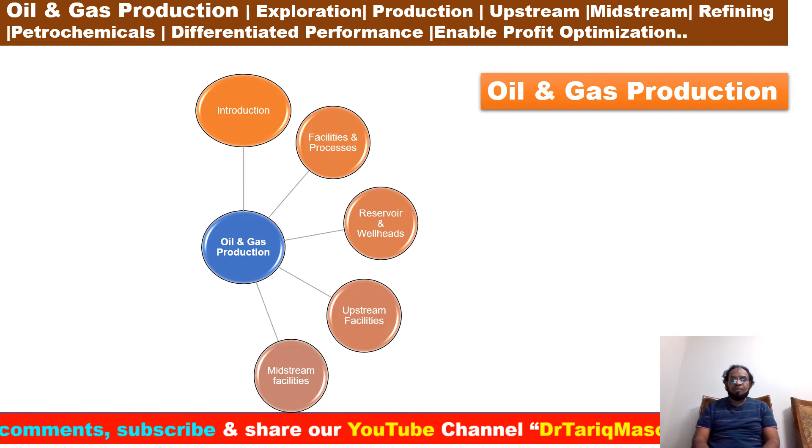Okay, this is my future plan. Oil and gas production, introductions, facilities process, reservoir and wellhead, upstream facilities, a midstream facility we have started today, refining facilities, petrochemicals, utility systems, unconventional and conventional resources and environment effects.

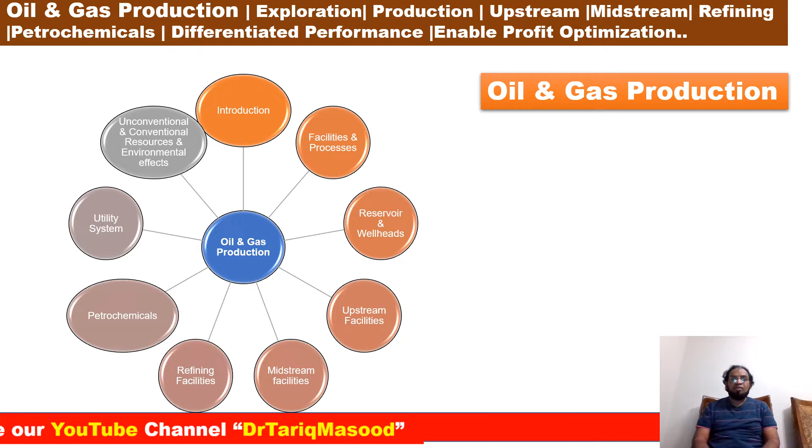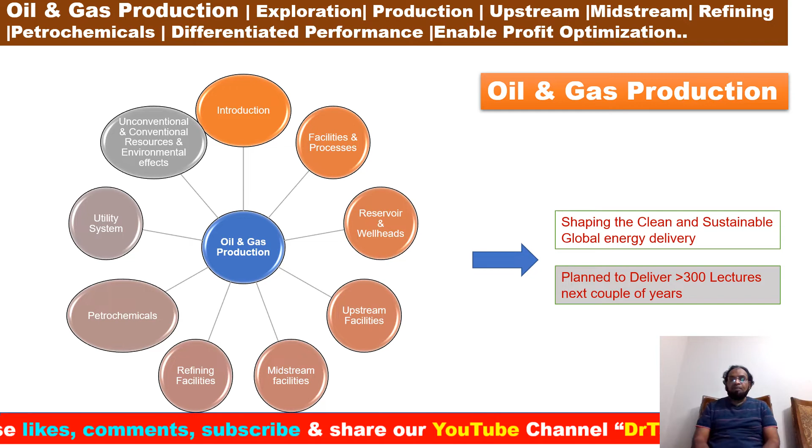Okay, what is the ultimate goal? Shaping the clean and sustainable global energy delivery. Plan to deliver more than 300 lectures in the next couple of years.

Okay, oil and gas production, midstream facilities, lecture number 17, gathering. Today we are going to discuss gathering system and gas compositions. Next, I'm going to demonstrate what are my key takeaway points. Key takeaway points from lecture number 17, facilities and process onshore and offshore. First, we'll discuss gathering system. Then we will discuss gas plant and gas composition.

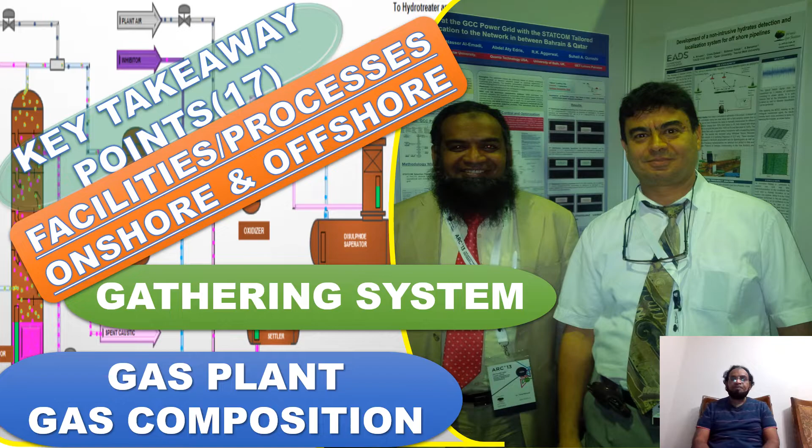Okay, midstream facilities. This is my first slide. Raw natural gas from the well consists of methane as well as many other smaller fractions of heavier hydrocarbons and various other components, including water. The gas has to be separated into marketable fractions and treated to trade specification and to protect equipment from contaminants. From the next slide, we will discuss gathering system.

Okay, gathering system. Many upstream facilities include the gathering system in the processing plants. However, for distributed gas production systems with many, often small producers, there is little processing at each location and gas production from thousands of wells over an area goes into a distributed gathering system. This system is generally composed of flow lines, FGS, and trunk lines.

What are the flow lines? A line connecting the well pad with field gathering stations, FGS, in general equipped with a fixed or mobile pig launcher.

Number two, FGS is a system allowing a gathering of several flow lines and permits transmission of the combined system to the central processing facility, also called the CPF, and measures the oil, water, gas ratio. Each FGS is composed of pig receivers, fixed or mobile.

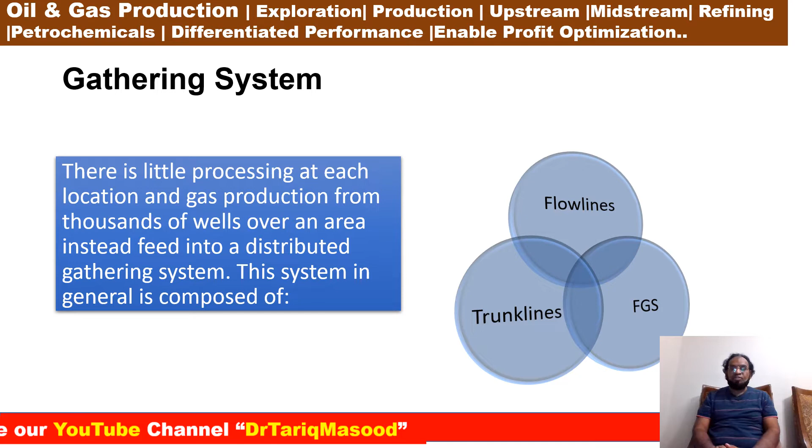Okay, gas plant, gas composition. When gas is exported, many gas trains include additional equipment for further gas processing to remove unwanted components such as hydrogen sulfide and carbon dioxide. These gases are called acids, and sweetening or acid removal is the process of removing them. Natural gas sweetening methods include absorption process, cryogenic process, adsorption process, also known as PSA, TSA, and iron sponge and membrane system.

Often hybrid combinations are used, such as cryogenic and membrane systems. Gas treatment may also include calibrations. If the delivery specification is for a specific calorific value, BTU per SCF or MJ per SCM, gas with a higher value can be adjusted by adding an inert gas, such as nitrogen. This is often done at common points such as a pipeline gathering system or pipeline onshore terminals.

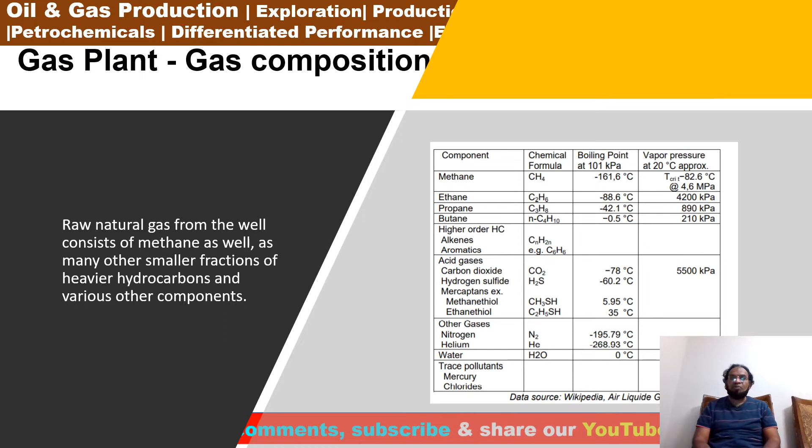Raw natural gas from the well consists of methane as well as many other smaller fractions of heavier hydrocarbons and various other components, as we have demonstrated here in the slide, with some data from Wikipedia. So you can further study the chemical formulas of methane, ethane, propane, butane, and acid gas, and the other components included in this table.

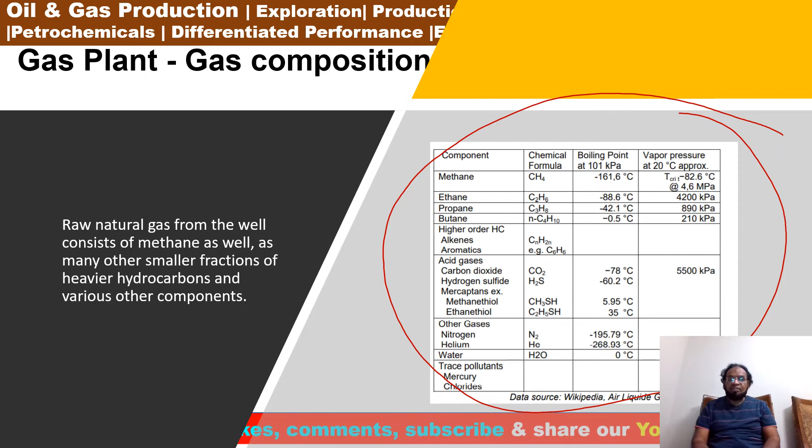Furthermore, natural gas is characterized in several ways depending on the content of these components: wet gas, dry gas, sour gas, acid gas, and condensate. First, wet gas is a raw gas with methane content of less than 85%. Number two, dry gas is a raw or treated natural gas that contains less than 15 liters of condensate per 1000 standard cubic meters. Sour gas is a raw gas with a content of more than 5.7 mg hydrogen sulfide per SCM, 0.25 grains per 100 SCF. This is about 4 ppm.

Acid gas has a high content of acidic gas such as carbon dioxide or hydrogen sulfide. Pipeline natural gas specification is typically less than 2% CO2. Acid gas fields with up to 90% CO2 exist, but the normal range for sour raw gas is 20 to 40%. Condensates are mixtures of hydrocarbons and other components, as we have discussed earlier. These are normally gases from the well, but condense out as liquid during the production process. This is a refinery and petrochemical feedstock. In my next slide, we will discuss raw gas and its product components.

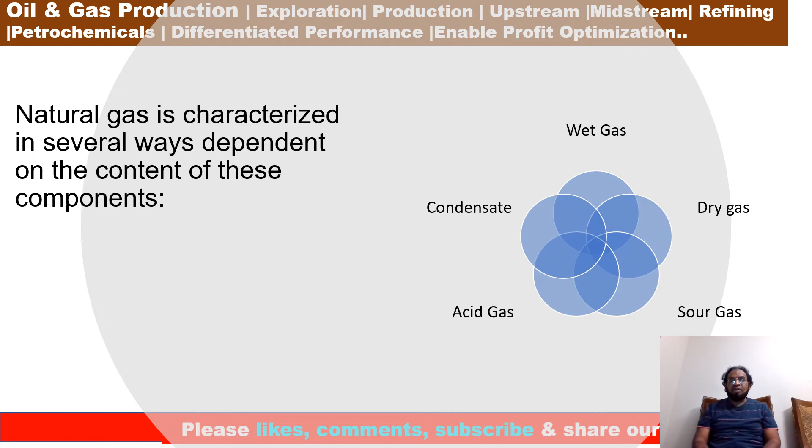Furthermore, raw gas is processed into various products or fractions: natural gas, NGL, LPG, LNG, CNG. First we'll talk about natural gas. In its marketable form it has been processed for specific compositions of hydrocarbons, sour and acid components, and energy content. The content is typically 90% methane with 10% other light alkanes. Natural gas liquid, NGL, is a processed or purified product consisting of ethane, propane, butane, or some higher alkanes, separately or in a blend. It is primarily a raw material for the petrochemical industry and it is often processed from the condensate.

Number three, liquid petroleum gas, LPG, refers to propane or butane or a mixture of these that has been compressed to liquid at room temperature, 200 to 900 kPa depending on composition. LPG is a bottled fuel for consumer domestic use and is also used as an aerosol propellant in spray cans and as a refrigerant, for example in air conditioners. Energy to volume ratio is 74% of gasoline.

Next is liquid natural gas. LNG is natural gas that is refrigerated and liquefied at below minus 162 degrees C for storage and transport. It is stored at close to atmospheric pressure, typically less than 125 kilopascal. As a liquid, LNG takes up 1/600 of the volume of the gas at room temperature. Energy to volume ratio is 66% of gasoline. After transport and storage, it is reheated, vaporized, and compressed for pipeline transport.

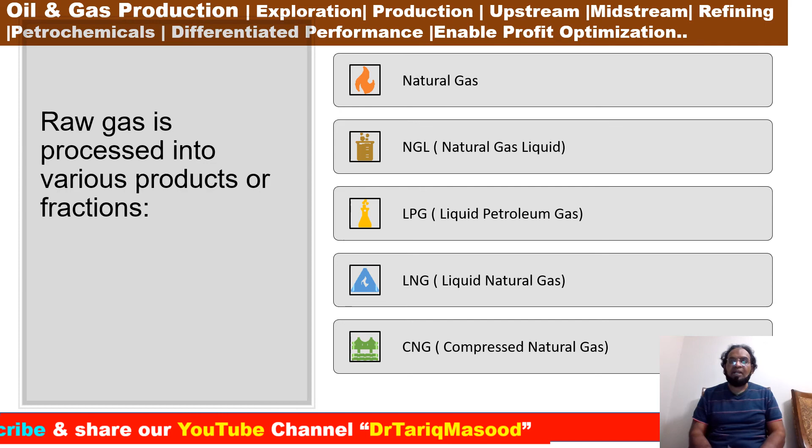Last is compressed natural gas, which is natural gas compressed at 20 to 25 MPa to less than 1% of its volume at atmospheric pressure. Unlike higher alkanes, methane cannot be kept liquid by high pressure at normal ambient temperature because of its low critical temperature. CNG is used as a less costly alternative to LNG. Today, we have discussed midstream facilities, gathering systems, and gas composition.

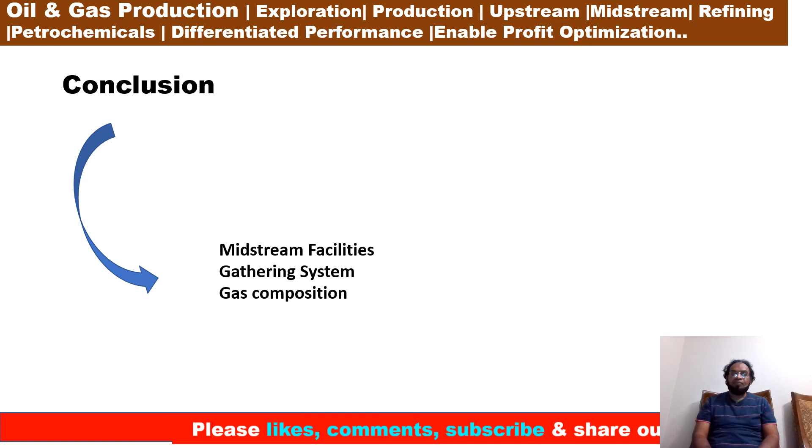Topic: oil and gas production. We will discuss gas processing facilities.